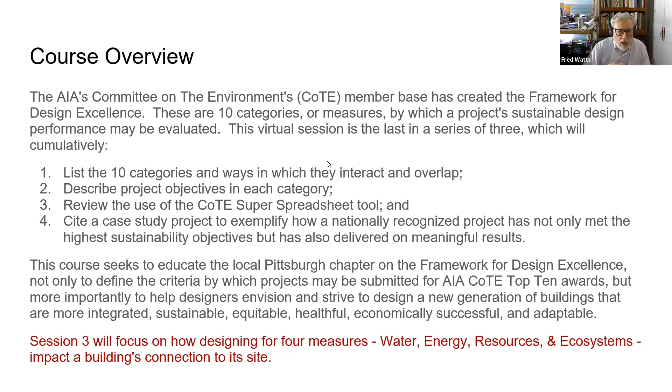So those are the learning objectives. You'll be familiarizing yourself with the COTE framework for design excellence, the conceptual questions that apply to each one of those sections, with the COTE super spreadsheet that most of you are becoming familiar with. And then a case study with Phipps Conservatory's Center for Sustainable Landscapes, the local project that we're all well aware of.

So starting off, we are dealing with design for water. You're looking at the landscape around the Phipps Center for Sustainable Landscapes. That presentation is from Ian Cook. Ian is a building rating systems project manager and an architect at Evolve.

At Evolve EA, he does certification management. He did the certification management for Pittsburgh International Airport. He's worked at the Bridger View neighborhood development in Bozeman, Montana, and the Greater Pittsburgh Community Food Bank's expansion and renovation. He's also part of the design team for several projects for the Pittsburgh Water Authority. He's consulted on LEED certification for the Gateway Arch Museum expansion.

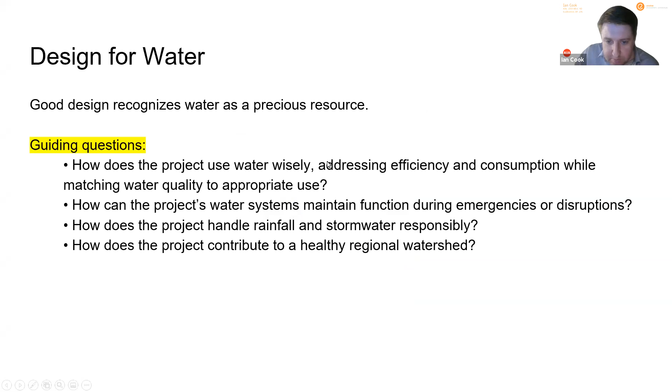He's going to be dealing with design for water and answering these guiding questions as we go along. Ian? Oh, yeah, sure. Thanks, Fred. Appreciate it. Let's see. So I was going to share my screen here. There we go.

Okay. Yeah, so as Fred mentioned, framework for design excellence, covering the design for water section. Good design conserves and improves the quality of water as a precious resource. Focus topics for this section include indoor water efficiency, outdoor water use reduction, process water reuse, capture reuse of gray water and/or black water, rainwater, stormwater use and management, and net zero water buildings.

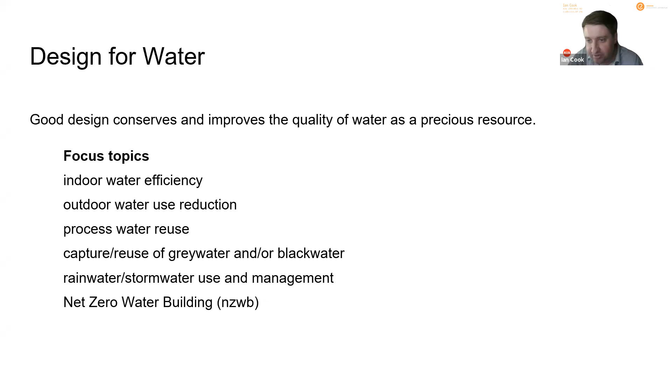Topics for consideration within the section include: how does the project use water wisely, addressing efficiency and consumption while matching water quality to appropriate use? How can the project's water systems maintain function during emergencies or disruptions? How does the project handle rainfall and stormwater responsibly? How does the project contribute to a healthy regional watershed?

Brad will explain how this was realized in the CSL and the Phipps Conservatory campus and what the water portion of the super spreadsheet looks like. But first, I'll go through a few brief high-level examples within the work of Evolve EA and previous work project experience.

There were quite a few projects from before I was at EvolveEA, going back a little bit. This one, upon its completion in 2003, the David L. Lawrence Convention Center was the world's largest green building at 1.5 million square feet, and was the first LEED certified convention center.

EvolveEA and its consultant team were hired by the Heinz Endowment and Sports and Exhibition Authority of Pittsburgh and Allegheny County to perform a post-occupancy analysis of the DLCC's green features, including water systems and existing data collection.

The EvolveEA team guided the LEED Existing Buildings pursuit, and the study culminated in the facility becoming the first LEED EB Platinum convention center in the world.

Some of the water features from this project include an aquifer used for landscaping, irrigation, and cooling tower feed, and a gray water reclamation plant, which reduced water usage by 66%.

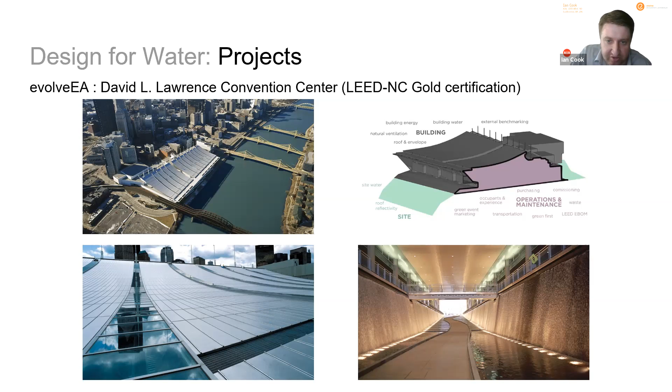The next slide here is the Frick Environmental Center. EvolveEA worked along with the design team, including Patricia Cully, who's on the presentation here as well, to help guide the project through the Living Building Challenge planning, design, and certification process.

Many aspects of the center's design combine strategies that holistically address its integration with the landscape. The parking area, for example, features permeable pavement and is covered with trellises that hold solar panels and collect rainwater.

The building is responsive to its natural environment through sustainable landscape best practices. It is also designed to manage all stormwater and wastewater on site.

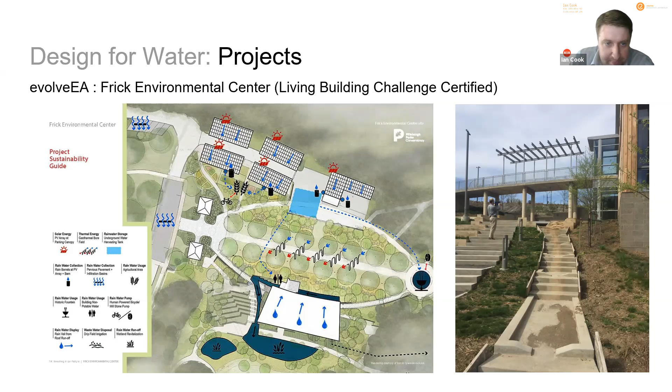This next project, the Ross Reserve through Purdue University — EvolveEA guided the development of this project from its conception through the design process. Site location, building program, and form were carefully considered throughout the process, with scenario testing for water calculations.

The client's commitment to living building principles gave an imperative to achieve net zero water use in the building's design. Just as a biological organism seeks homeostasis using feedback loops to adjust to changing conditions of its environment, the architecture frames and captures site forces such as stormwater, wind, and plant communities.

This next one is a current project. EvolveEA is currently working on a number of projects along with the Pittsburgh Water and Sewer Authority. Investing in the infrastructure will reduce water loss.

Many of the pipes in the system are over a century old, and incremental replacements with modern fittings will reduce water loss over time. PWSA is making significant investments now on major components of the distribution network.

Water is a single resource that connects us all and must be managed collaboratively. So that's sort of an overview and an interesting look throughout the Pittsburgh region.

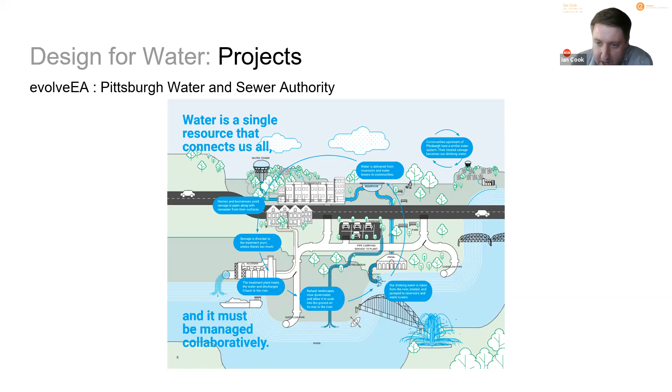The next project, from previous work, is the Jan Phillips Learning Center, an offsite extension of the College School's urban campus in St. Louis, Missouri, which expands on their mission to engage and captivate students through nature-based experiential learning.

Rainwater is captured and reused, composting toilets reduce water consumption, and the project makes use of natural resources that would otherwise be wasted. An aqueduct feature helps create not only a place for learning, but also spaces that can be learned from — there's the aqueduct feature there, the concrete retaining wall.

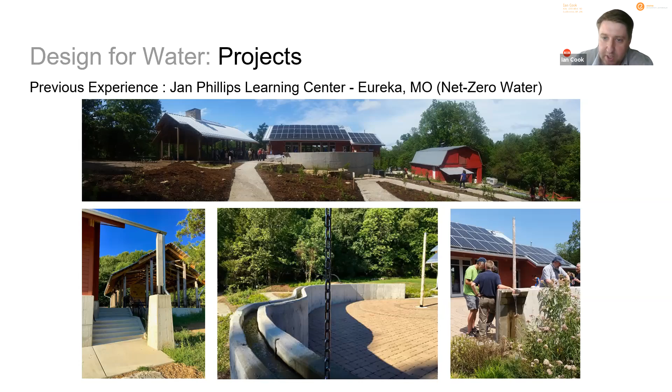The scope included providing a feasibility analysis and creation of a master plan for the overall site. Great effort was made to protect LaBarque Creek, located on the property, which is one of the most pristine tributaries to the Meramec River, which then flows into the Mississippi.

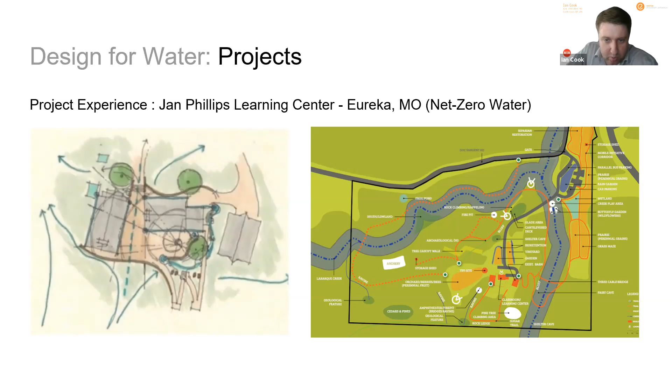That was the section on water, and those were the projects I was covering here, so I can stop sharing. And then I don't know if it was Brad who was going to take over at this point.

Or on to Craig? We're going with Brad next. Yeah, thank you, Ian. Let me pull up the screen share.

Thank you, Ian. Yes, so throughout the previous two workshops and then during the course of this third workshop today, what we've been doing is sharing...

...taking our Phipps Center for Sustainable Landscapes project, which is an on-site building at our Phipps campus that houses our administrative staff as well as some of the environmental education programming.

It was constructed in 2012. It is a certified living building, so you'll see some of the features that I'm going to highlight here in the resulting three topic presentations.

I'm going to emphasize those principles that are contained within the Living Building Challenge certification process, especially related to water, energy, resources, and ecosystems today.

So what is the sort of highlight of what Ian was showing before from the framework for design excellence, principles that I'll try to reflect in how I share how we completed the COTE super spreadsheet tool to respond to the specific questions, hopefully share examples of our experience completing that tool, and then how the project itself reflected not just the framework guidelines but the specific questions referenced in the COTE super spreadsheet tool.

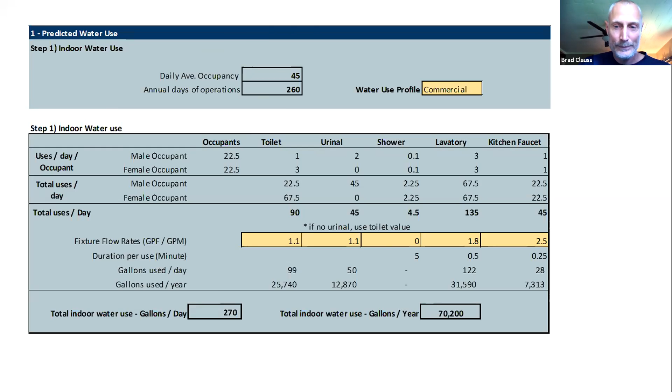The second question, which I think explains why some fields in the corresponding irrigation estimator didn't produce numbers, was because I answered specifically for the CSL project that potable water is not used for irrigation. It's all rainwater harvested that we use for irrigation on the project site. So I think that explains why some fields didn't populate, you'll see blanks under annual irrigation water use calculation. I believe if you answer no, the spreadsheet won't populate that for you.

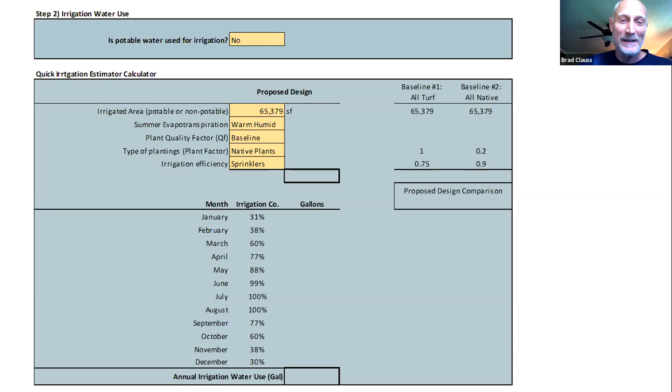There were some parameters we pulled from the project site itself for CSL: the irrigated area estimate of roughly 65,000 square feet, the climate zone for estimating evapotranspiration, plant quality factor which was a range from water stress to non-water stress, which I qualified as baseline, and our estimates based on a typical precipitation event or year. For type of plantings, our planting plan involved all native plants, so that was an easy one to specify. For irrigation efficiency, we have a small amount of drip irrigation, but we also still rely, unfortunately, on sprinklers in a lot of cases when we do irrigate.

The cooling tower section is probably applicable to a lot of project sites with larger cooling capacity, where you'd need to fill in these fields. For us it was simple because we don't have cooling towers or chiller systems involved in the project or associated with the HVAC systems at CSL. So our cooling tower water usage was zero, and non-applicable was our response to the other questions related to cooling tower water efficiency. But having worked with cooling towers before, I understand this could be a significant source of water use at a site that does use them for HVAC.

The second section of the water spreadsheet looks for a combination of predicted or modeled water usage compared to the actual measured performance period of water use. For our project, we had a formal performance period through the living building certification process, so I was able to easily extract that 2014 full year performance data. So the numbers represented here show how the site performed. The model numbers are largely estimated calculations based on precipitation for the rainwater extrapolated out over the year, a rough estimate of evenly divided precipitation across the 12 months.

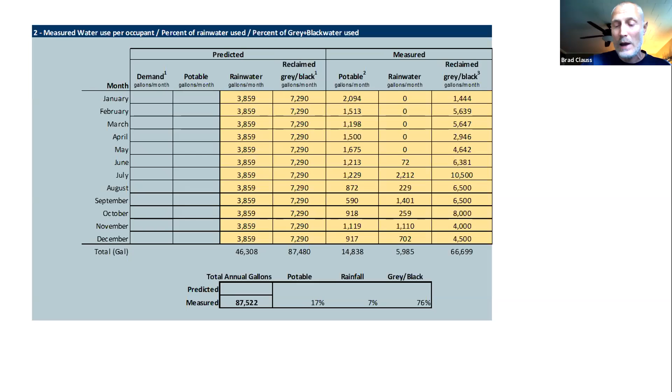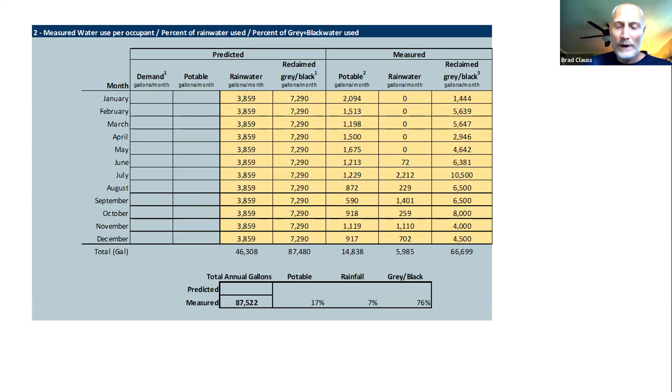Reclaimed gray and black water was estimated based on the potable water discharged to the sewer, which is all treated on site and then reclaimed to be reused for toilet flush. So that's basically an estimate of what our fixture flows put into the system would be, extrapolated out over the year. All said and done, the estimated total annual gallons came out on the measured side around 87,000, just under 90,000 gallons per year. You can see the breakdown, partitioned by potable, rainfall or rainwater recaptured and reused, as well as gray and black water reused at the campus.

Overall summary - I think it didn't produce some of the predicted numbers you'll see in that first section because the tool was missing irrigation. But on the measured piece, it's a little unusual because the site is net positive water, so the numbers will come out negative. What this is showing you is that we harvest roughly 57,000 gallons more water than we actually use from a municipal potable source.

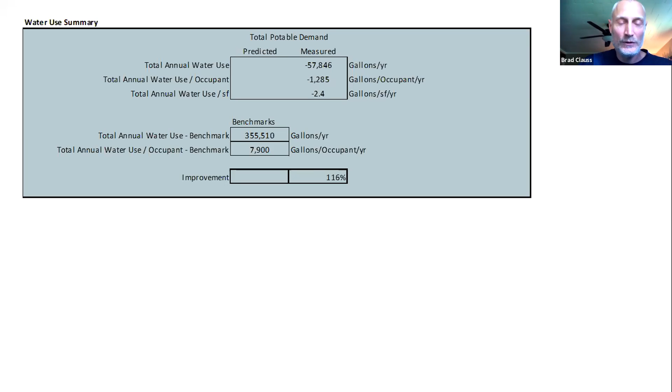Stormwater management is the other key component of the tool and the water measure, focusing largely on storm events - in this case a 24-hour, 2-year event. This was something we were able to pull from our existing stormwater calculations, going back to the reference design information for the stormwater systems at the site and pulling out the 2.35-inch, 24-hour, 2-year event for our region in Pittsburgh.

There's a calculated storage capacity from the combination of our retention basins, plus some infiltration galleries with fixed storage that aren't lined and infiltrate into the subsurface. All told, we've got about 13,000 cubic feet of capacity for rainwater storage, which is pretty enormous. So in the overall calculations and measures of efficiency, at least from a 24-hour, 2-year storm event, 100% of the stormwater on our site is handled on site and will never leave.

The last question was related to the treatment of stormwater conditioned on the site, on a scale of 1 to 5, and I believe my response was 4 - just below the maximum score, which was that the runoff is mostly treated through natural filtration, a combination of rain gardens, bioswales, and retention for infiltration purposes.

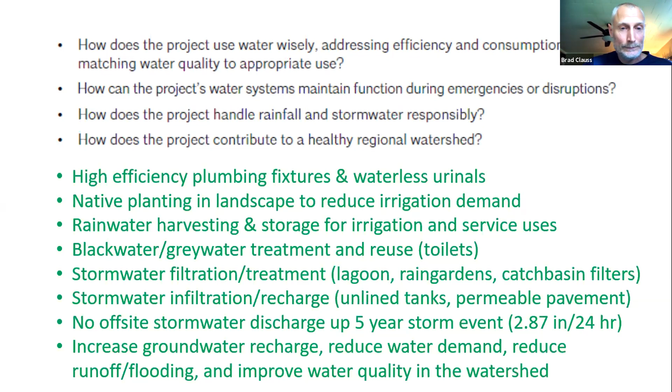We're actually capturing some of the rainwater that's not from the project site, from our tropical rainforest roof, harvesting that and storing it so that we can use it as a backup for the toilet flush system, as well as for all of our irrigation and other needs at the site itself.

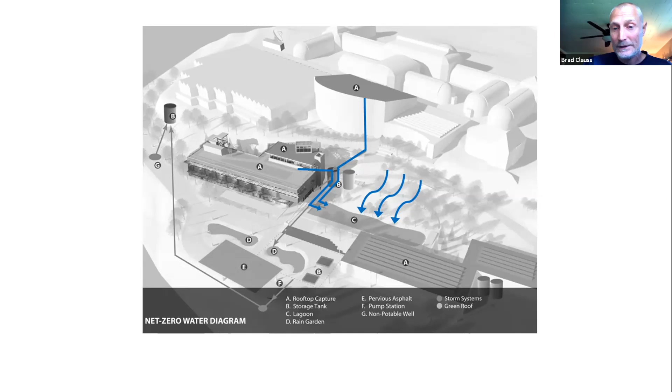There are a number of other areas where the actual groundwater flow is feeding the on-site lagoons or other sources of storage at the site. This big blue section you see illustrated here is actually a combination of a lined underground storage tank and an unlined underground storage tank.

So the surplus water from runoff that would exceed the volumes of the rain gardens could overflow into that unlined tank for additional storage capacity. Then that much larger underground storage tank is a reservoir of stored rainwater from various different rooftops at the site, which we can harvest not just for use in the CSL, but also for use at other parts of the larger campus.

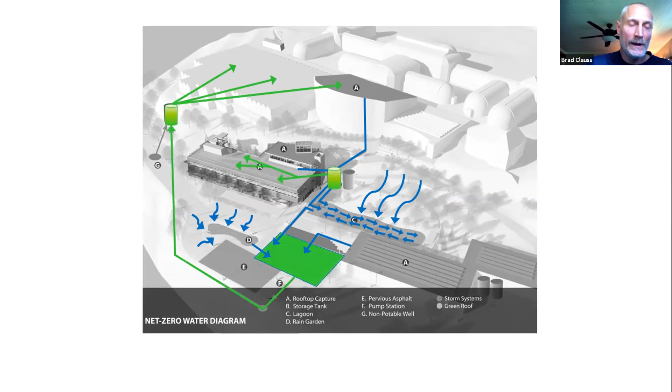The last representation is that there's a second upper storage tank that we pump water to, where we can actually pump that to other parts of the campus, mostly to our production greenhouse.

This is actually a similar representation or demonstration of what the system for our on-site wastewater treatment looks like. So all the gray and black water from the CSL goes into the first stage of treatment, which is basically a traditional settling tank where the solids are removed. Then from there, it passes into a constructed wetland for biological treatment.

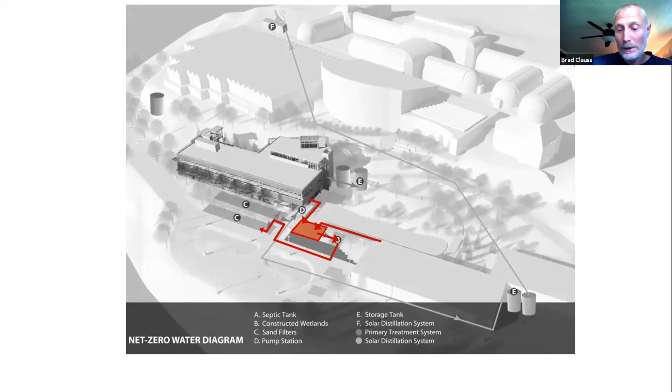After it passes through that constructed wetland, it then goes through a series of recessed in-ground sand filters for a more formal mechanical form of treatment. Ultimately it's recollected in a cistern, which is then pumped to a temporary storage tank adjacent to the building, where it can be harvested and recirculated for use in flushing the toilets at the site.

This additional system you're going to see represented here was originally planned to take care of the excess volume we accumulate over time from the reuse water system. The original intention was that this would be used for evaporative distillation on one of our rooftops at our production greenhouse. Unfortunately, this is an example of a technology that didn't pan out the way we expected—we're always innovating, and in this case the innovation didn't pan out the way we expected it to.

So that water is currently still being collected, and we're trying to find an alternative use for it, since this distillation technology didn't quite do what we expected it to do. That piece is something we'll probably do additional treatment to that black water so that we can apply it for irrigation somewhere else at the site.

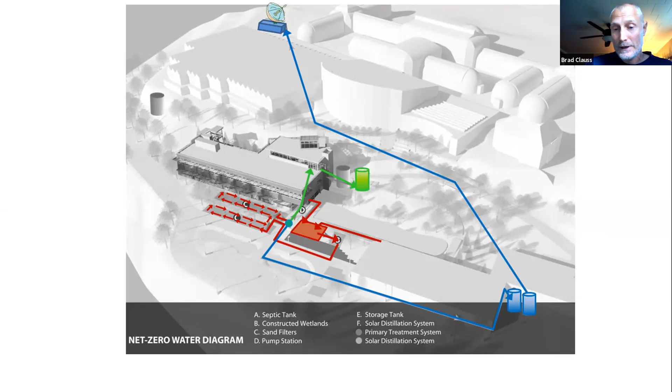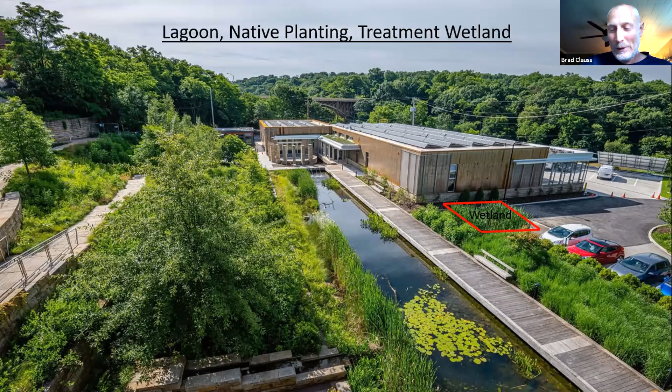This is a good aerial view that gives you a sense of the lagoon and how it's interconnected and associated on the property with our constructed wetland. You can see it highlighted there, though it gets lost in the green, but underneath that there's actually a constructed wetland.

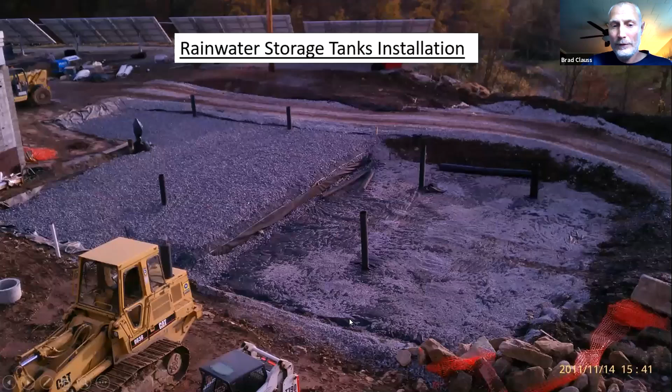Second to the foreground is an unlined underground storage tank, designed primarily to take excess flow from some of the rain gardens and any additional flow that can infiltrate, functioning as an infiltration gallery, as opposed to a storage tank from which we can actually recover water.

This gives you another stage of the construction. You can see what it began to look like before it was capped, with the rain garden and the pervious surface of the asphalt.

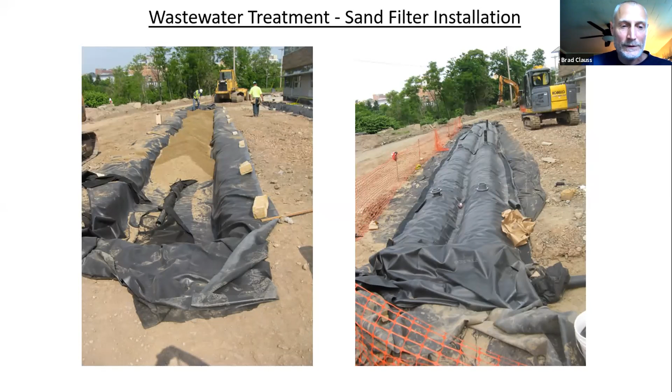And that covers everything for the water portion of our CSL project.

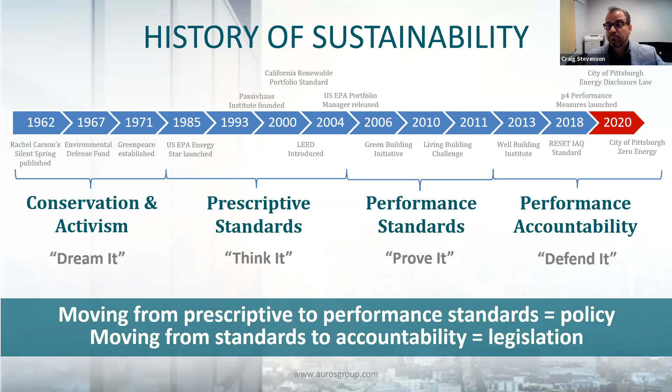When you deal with outcome-based design decisions, you really have to start to understand how you get there. What does the end game look like? This idea that LEED and other sustainable certification programs have taught us is that you start at code-based construction and you work your way down. I want to be this much better percentage-wise based on ASHRAE or based on code-based standards. And we always work our way down.

When we do that, we find that we might get 10 or 15, maybe 20% better than code-based standards. The other way to look at it, and what we're seeing as a macro trend in the market right now, is starting with a bottom-up approach.

The question becomes, from a building science perspective, what is the most efficient building we can build? Passive house really kind of leads that discussion. And then when you consider that with the natural order of sustainability, what is the natural order of sustainability? It's a passive first strategy.

Active second, renewables last. We want to make all of our decisions around the envelope: massing and orientation, envelope optimization, climate specific thermal values, to maximize our passive strategies. That reduces our loads. Once we reduce the loads on the building to a building science maximum, then we want to start to ask ourselves, okay, what's next?

Well, let's look at our active systems. What happens when you get to those low loads is you start seeing decoupling happening. We're going to deal with our ventilation systems with energy recovery. We're going to deal with our heating and cooling systems with systems that we wouldn't have otherwise used, like VRF for example. In a code-based structure, that might be a very expensive solution that we simply can't afford. But in a passive house project, or a project with very low loads, that becomes a very real strategy.

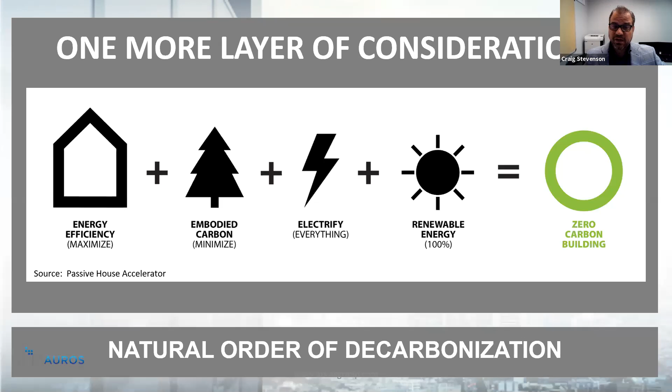And renewables last—you want to offset whatever low energy consumptions you have on that building with renewables. That's how you get to zero energy carbon. That's referred to as the natural order of decarbonization, which is kind of interesting. And what you'll notice here is these three strategies—energy efficiency, electrify, and renewable energy—they are enabled by the natural order of sustainability.

So where does the money go when we start looking at envelope-first strategies? We know we're going to invest a little bit more money in the envelope. The insulation thermal barrier is going to be a little thicker. We would argue that the air barrier goes in most buildings. Unfortunately, it doesn't get tested in most buildings, but it goes in most buildings. So that should be relatively par. And the windows and doors become a little more expensive.

That's true in certain climate zones, but we get the money from the mechanical system. So rather than putting a 300-ton air conditioning system on the roof, that becomes a 50-ton system. We take the money from that, we put it in the windows, and that's how we basically get the cost parity. And we'll show you the differences between small buildings and big buildings and why this strategy works way better for big buildings. I'm going to have a few slides on how we're going to show that.

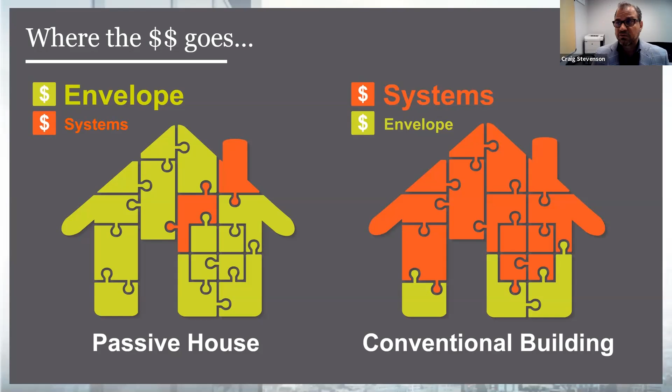And another thing here is insulation never breaks. So if we take a passive-first strategy, that's going to be in place for 50 years if it's done right. And if it's QA/QC'd right, insulation simply just doesn't break. It just lasts. And it's really a simple idea.

Find one—Carrick Library is a public passive house project. Walk in there in the middle of wintertime. You'll see the buses going up and down the street. You don't hear them at all. You don't feel them because basically you're in a soundproof barrier. There's so much insulation in there.

And if you put your hand on the window and then you put your hand on the jamb, you're not going to feel a delta in temperature. That's really what a passive house is all about. It's a simple, simple idea of keeping your energy and not just sending it out into the environment.

So what does that mean? If you think about it from a passive house perspective, if you really want to use building science to get there, there are five key principles. Climate-specific insulation levels. Now we might say, okay, well, we're already at climate-specific insulation levels. What Passive House has done is they've identified the law of diminishing returns. When does the envelope stop paying?

Does it stop paying at an R38? Does it stop paying at an R50? We've been on projects where they're doing a re-roof and they specified an R50, and we asked them why. And they said, well, we want to save energy. Did you model it? Did you know that that's your efficient level? After we basically got into the project and identified their low energy solution, they ended up going to an R32. They didn't need an R50. So they were kind of overshooting it because they just didn't understand the processes.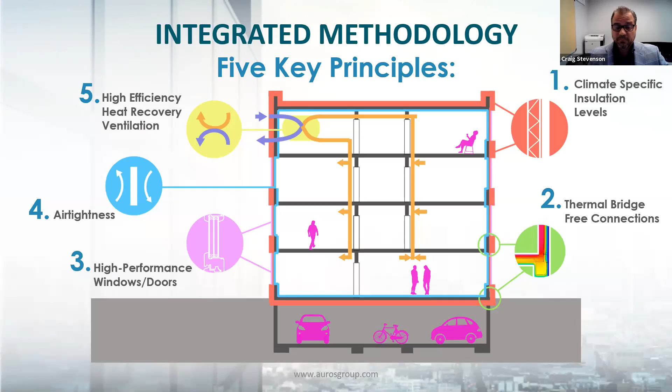So there's a mantra in passive house: maximize your gains and minimize your losses. It's all about balancing. When you get into a project for a passive house, you're balancing everything. Someone told me at one time, it's like having six dials and you're moving dials to figure out—I want a little more wall insulation, a little less U value in my windows—and you start dialing then.

It's all about balancing the energy balance for the optimum performance of a building. So you're optimizing the thermal enclosure, you're optimizing your heating gains, and you're optimizing ventilation, and you're doing this all in the context of a whole building. And this can only be done with an energy model. You can't put a thumb in the air and kind of guess your way to it. You really have to use whole building energy modeling to answer these questions.

And again, this gets at active systems with smaller loads, decoupling, and ventilation with balanced energy recovery. So these next three slides are probably the most important slides that I kind of grabbed based on the time we have here today. And I can't tell you how often I've been on projects where the teams have simply just disrespected building science, and you're seeing buildings that have crazy massings.

But having said that, I understand architecturally we want to build beautiful buildings. But if you understand your surface area of walls to volume of air ratios, and you understand what good and bad looks like, you can start to manage that.

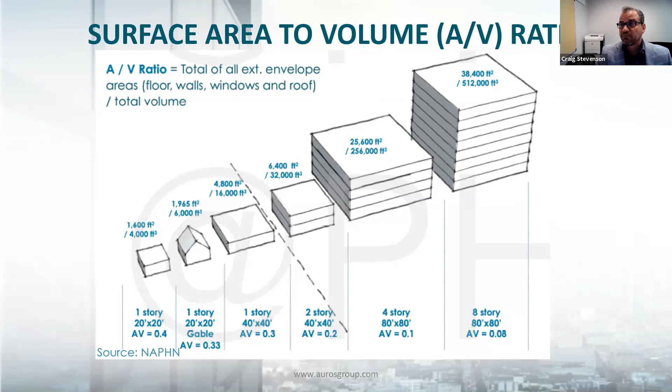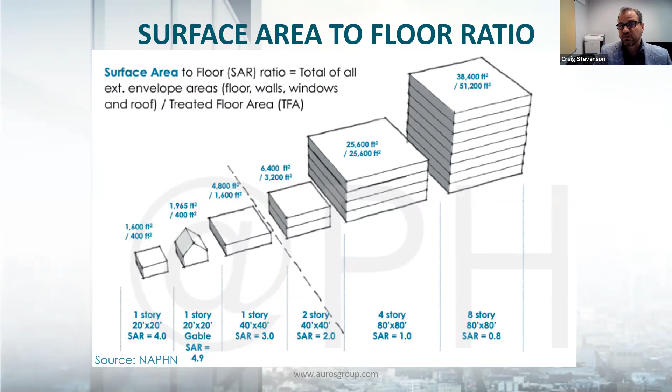You can also do it by looking at the surface area to floor ratio. Not as accurate, but if you're talking about early conceptual massing and just looking at what your massing might be best suited for, you can take an SAR value. Here are your targets: 0.8 for really good buildings, and 4.0 for really challenging buildings. I'd argue that the surface of wall to volume of air ratio is a much better way to do that early analysis, but you can certainly do a quick analysis with just surface area.

So this is a really important slide to keep in mind when you're starting to think about orientation, glazing, shading, how you optimize your solar gains and losses. This is where slides like this become very helpful in early conception when you start considering your passive house envelope for continuous insulation, thermal bridging, and air barriers.

If you do everything right, it becomes a win-win-win strategy. There's a reason we lead on all the projects brought in to talk about with passive first strategies, because when you solve for passive first strategies, it leads to everything else.

When I have a tight building, I control infiltration and exfiltration. I'm keeping the outside out and the inside in. When I want to ventilate, I'm bringing it through my ductwork and filters. Now all of a sudden that fixes indoor air quality very quickly. So you can see that the envelope is the pathway to indoor air quality.

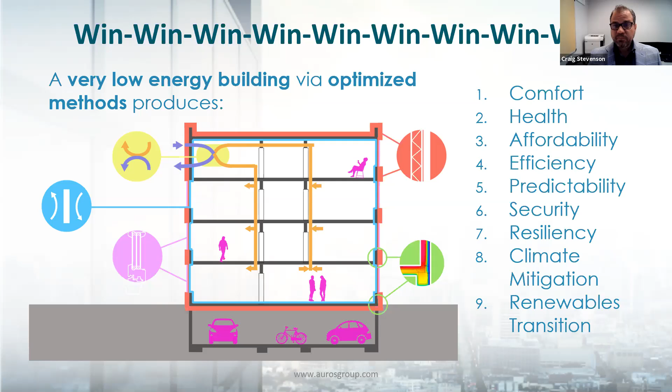This is how you do a renewable transition, because now all of a sudden we have affordable photovoltaic arrays. So I promised you guys I'd give you a few case studies.

This project here is the East Liberty Presbyterian Church. I'm sure most of you are familiar with it. When we were brought into this area, we were doing a mechanical retrofit for the church, and we started to take a passive first strategy. You might wonder how the heck do you do that? It's all limestone. And it is. But we basically created airlocks around the entrances, and we were able to basically contain air that way.

All of the existing windows were basically treated. We sanded down all of the pitting for the aluminum, and we put new gasketing in. We did a blower door test on this—it was the biggest blower door in Pittsburgh at the time. We were able to basically reduce their energy consumption by 30%, using passive first strategies.

This building became a Reset Air certified building. Reset Air is an indoor air quality standard. If you don't know about it, you probably should Google it and check it out. There's a lot of Reset Air work going on pretty much everywhere. Every project that we're doing is a Reset Air project at this point.

And this building is also a smart building, so it is tracking and trending digitally all of its mechanical systems, all of its utility consumption, and reset indoor air quality for Reset Air. These are just some images about the dashboards, and I'm more than happy to show the dashboard. It's a public dashboard for this—if you need it, just shoot me a quick email.

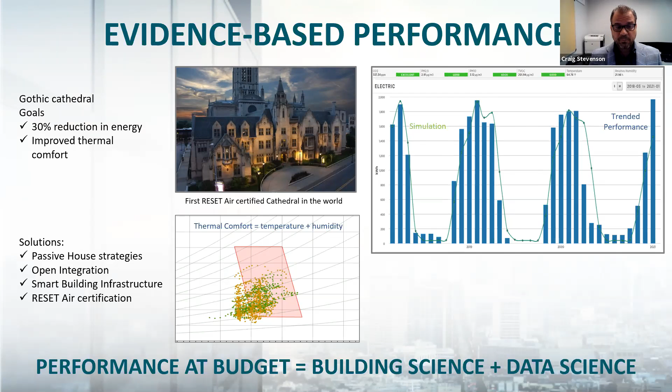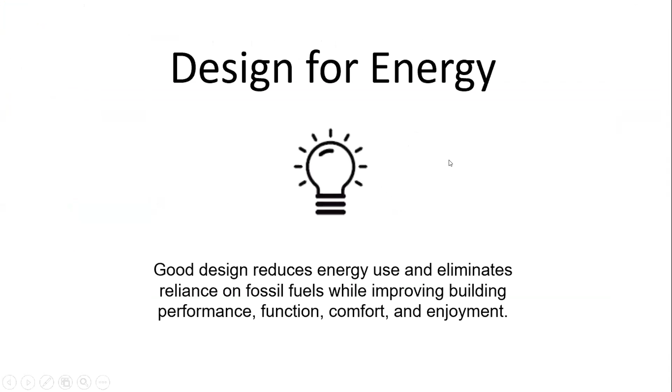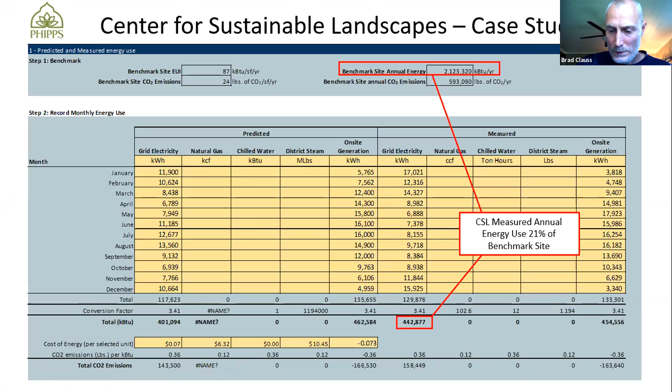Thank you, Craig. I think you'll see that a lot of the principles Craig was just describing, especially with the early slides he shared about where we started, will line up with what I'm sharing. Our project emphasizes starting from passive, then active, then minimizing what we'd need in terms of overall offset. Certainly we meet electrification, so all those principles will line up with the CSL.

Obviously this is from 2012, so things have moved along even further in terms of passive house design since then, but a lot of the same principles you're going to see emphasized here are reflected by the performance metrics in the tool itself.

So these are the first inputs into the COTE super spreadsheet tool, similar to water, just an overall evaluation of what our energy model was predicting for usage in the building versus what our actual measured performance was, which is what you see highlighted here in the chart.

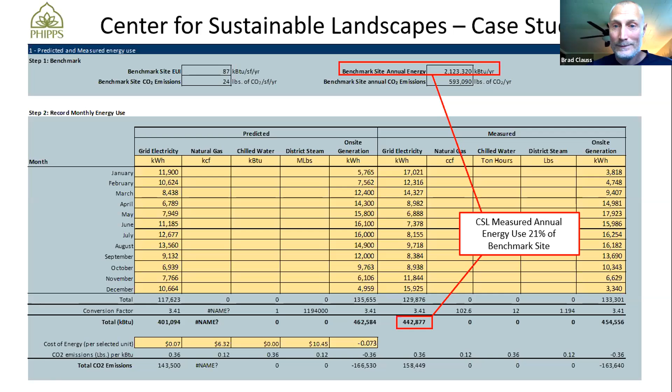So reflecting on the specific strategies we employed for the CSL, it goes back to what we referred to before in terms of starting with the passive components we put in place simply to avoid having to do anything active in terms of energy input for conditioning the site. One big one, early in the process, was orientation of the building so that we could maximize daylighting and passive solar heating.

So you'll see in one of the upcoming slides where I'll share how the building is oriented, picking up certain south-facing elements of the building to maximize those parameters.

Natural ventilation: when outdoor conditions warrant it, we have the capability to open operable window vents and roof vents, as well as a large number of door systems. We have a lot of glass walls and folding door systems on the main vestibule of the building that can be opened up, so certainly this time of year and in the fall there are a lot of days where we're able to take advantage of natural ventilation to condition the space and bring in outside air.

We also have a green roofing system on the third story. There's not only the traditional green roof benefits of stormwater runoff reduction, but also some insulating properties that it's offering us on the second and third story of that building to minimize, in terms of the envelope itself, the heat load of the building.

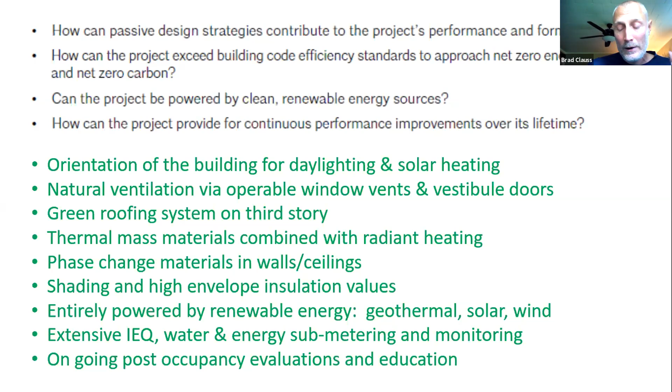So in terms of our long-term performance, we're constantly analyzing the building and tweaking it. That's always an important principle to highlight: the work isn't done once construction is completed. We're constantly intervening with this building and looking at ways to improve its performance over time. The other piece is we're always doing ongoing post-occupancy evaluation to see what we could do and what the customers and occupants are telling us about its performance. And ultimately, situations like this are where we share and educate others about what we've installed and some of the learnings we've derived over the years since 2012.

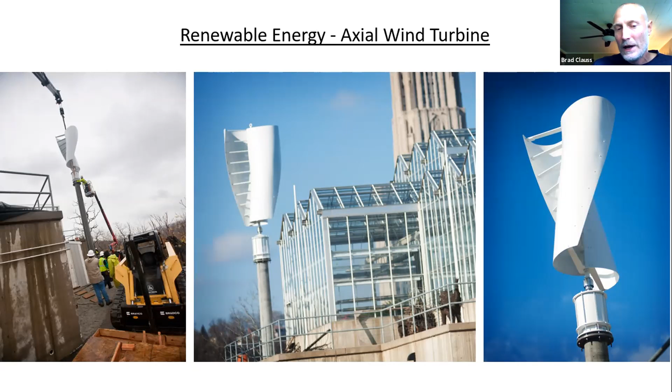This is the small demonstration wind turbine, an axial wind turbine that we installed, which also complements or supports the renewable offset for the CSL building and project. Ideally it should be at a higher elevation, but because of restrictions with the city, it is not at its ideal or maximum elevation to produce the desired output. So it does get some interference and windbreak from the structures behind it, the production greenhouse and some of the adjacent structures. It does produce, we monitor it and track it, but there's certainly the opportunity if it were sited at a higher elevation to have a lot more production associated with it.

These are some photos of the geothermal installation for the site. It's a total of 17 wells sited just adjacent to the property, most of which are right on the edge of our parking area for the site. You can see here demonstrated him setting the supply and return piping in one of those vertical wells.

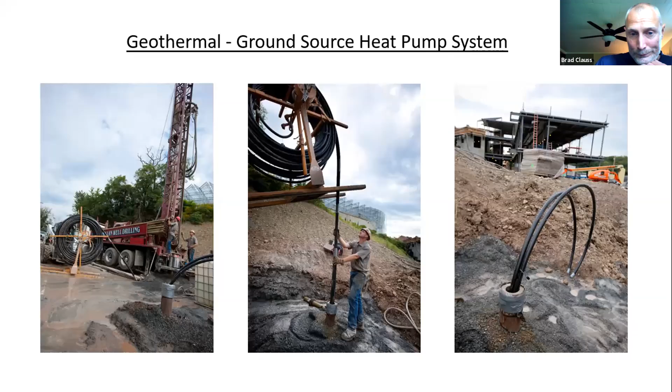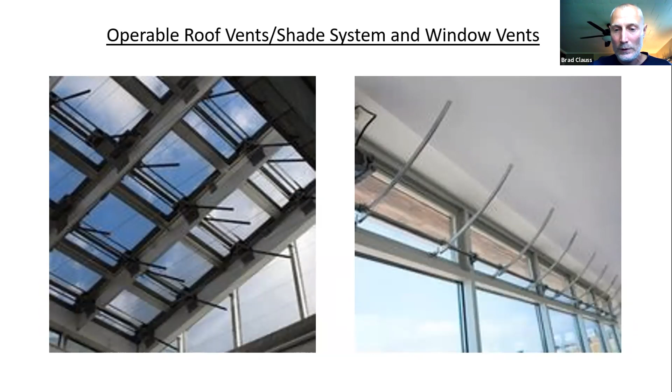These are just examples of our operable roof vents in the atrium. On the right-hand side, you'll see that each of the workspaces has upper windows with operable vents that open based on certain outdoor air parameters, allowing natural ventilation to occur in the actual occupied spaces as well as in the atrium.

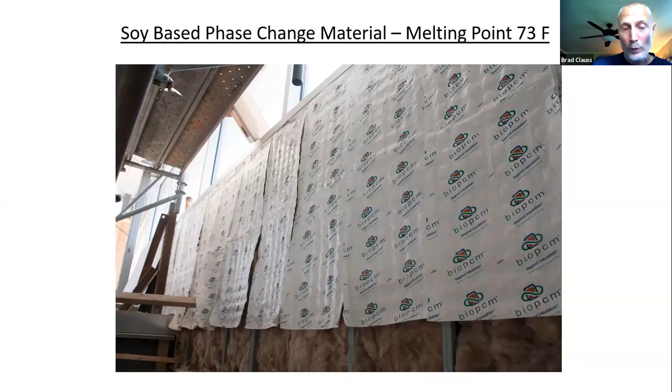This is a shot of this soy-based phase change material. The unique melting point property of this lends itself to a melting cycle that allows it to, the primary benefit of it is during the nighttime, the phase change of the material actually adds additional heat to the space, allowing us to maintain overnight, particularly in the winter, heat that was stored in that latent heat of phase change of the material back to the space. So it's acting as a source and sink when we want it to inside the walls themselves.

To address other specific parameters they're looking for inputs on for the COTE spreadsheet, one is related to lighting power density. We did, fortunately, through the energy modeling, have a target parameter for that. Our installed lighting power density was 0.75 watts per square foot. When you look at the tool itself, that put us at roughly just below 30% reduction over what the benchmark site called for, in this case an office/educational space, which was the majority of the footprint of the building. That is the benchmark density for lighting power density that we used for this project.

One thing I will note is if you go into the current tool referenced in the COTE spreadsheet, it's going to the 2021 International Energy Conservation Code, and it's a significant step up because of all this solid state lighting technology. So 0.75 is probably no longer relevant. For 2015 targets, yes, we did exceed our target parameter and come in below it. But most of the spaces across the board have significantly reduced watts per square foot in these new International Energy Conservation Code target numbers for the various different spaces. I was a little surprised to see it goes down pretty substantially with all the low wattage from the solid state lighting that's introduced now.

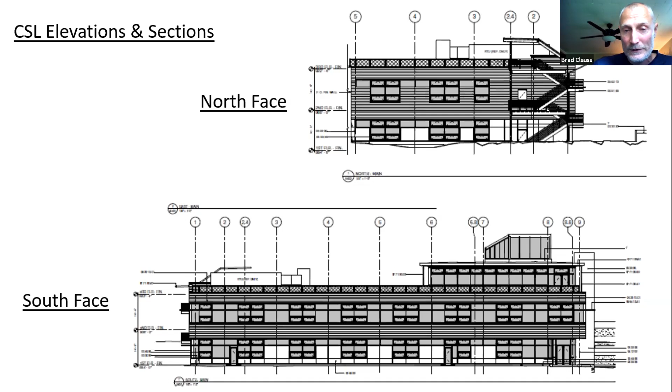So good to know that we were in the target range of 30 to 40%. We're sort of towards the higher end of that, but when you see some of these slides, particularly on the south face, we've got a pretty significant footprint of windows. I think on that face I was getting close to 50% of the south face actually covered by window space. Obviously on the north face, slightly less, but still not insignificant in terms of coverage of windows versus wall. And then a little bit less or more modest on the west and east faces of the building, which are in general the slimmer profiles and the sort of rectangular footprint of the site. I think that covers everything I had for the energy piece.

Next section is on resources. Let me share my screen.

Alex Co is dealing with that one. Alex is a research manager at the Living Building Challenge, Living Building Product Challenge. He studies embodied carbon, material health, environmental impact. He's certainly a materials expert. He has training in chemistry, toxicology, and life cycle assessment, as he came up in the business doing nonprofit consulting, and really has a heart for environmental justice. He's a Living Future Accredited, a LEED AP, has credentials in GPRO. He's got a master's degree in environmental management and a BS in chemistry from Yale. He claims he's a proud low-income, first-generation college student. So take it away, Alex.

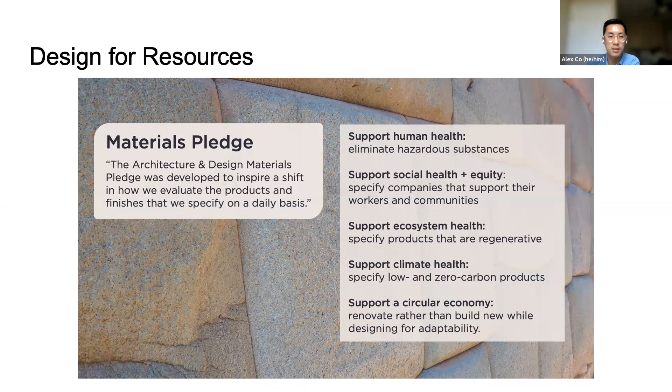Because we're talking about this more closely, I just wanted to share a couple of recently certified projects by ILFI that I think had some really cool materials achievements. For me, design for resources explores this tension between what's tangible and what's hidden or embodied with respect to emissions, impacts, and supply chain.

With the Kendeda Building in Atlanta, that team took one interesting approach: creating a materials committee comprising sustainability experts from their contractor and the architect to collectively find materials suited to the project requirements. What's interesting about it is that it's in a humid southeastern US climate, so there needed to be insulation as well as making sure that energy consumption would be reduced while operating in that climate.

With the Harvard Science and Engineering Complex, one story that came out of that project is the team investigated over 6,000 materials options in the construction process. Some things in that type of project, like lab equipment, aren't necessarily always common and asked the materials questions of substances, embodied carbon, and all these things. So just two projects that we were able to support through certification pretty recently that I think had some great stories.

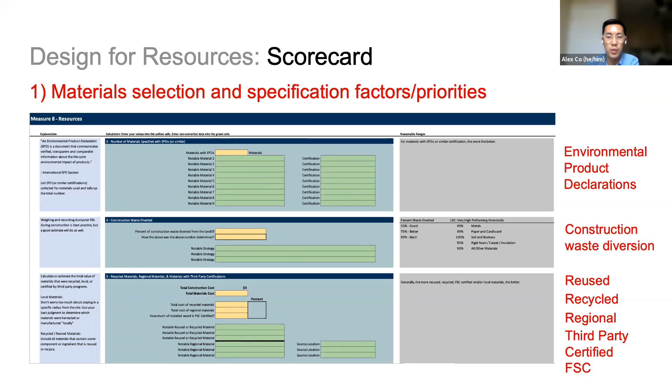Looking at the scorecard, there are 5 individual sections, and one set of the prompts speaks to materials selection and factors at that individual material level. The first are environmental product declarations, or EPDs, the use of reused, recycled, regional materials, third-party certified materials, FSC woods, and then the act of considering waste diversion during the construction process.

I think much of this gets at the hidden and embodied emissions incurred by actually creating and manufacturing materials. We can think of operational energy that shows up elsewhere after occupancy, but there's a whole set of impacts associated with the greenhouse gas emissions arising from manufacturing, installation, maintenance, and disposal of building materials and packaging during the construction of buildings and infrastructure. In the general discussion, we see steel and cement getting a lot of focus because of their energy-intensive processes to make and extract the raw materials that go into them.

Within the practice of life cycle assessment at the building scale, there's a tool called the EPD, or Environmental Product Declaration. There's a whole vernacular around what scope and what letters and numbers refer to in that type of disclosure, but usually the focus is around A1 to A3, which you might also know as cradle to gate scope. For the individual product level, that's the concept of focus, because that's what's pretty standardized for manufacturers that they can directly control.

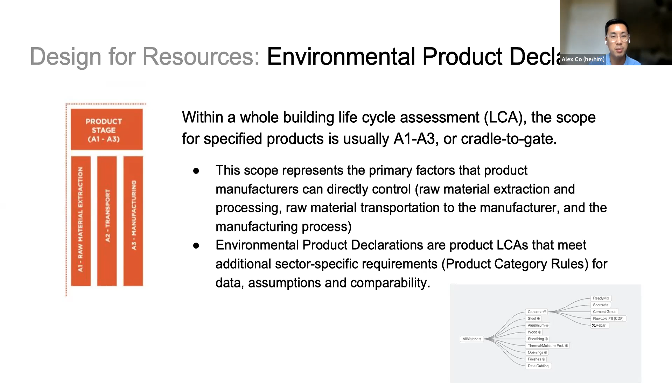The section on reused, recycled, regional speaks to mitigating emissions associated with manufacturing, because there are three different approaches that reduce the impact of a globally sourced product in different ways. I think there's the idea of always considering materials reuse first, because that completely eclipses and avoids a lot of the emissions associated with manufacturing something, especially if it's in situ and you can just build around it if it's a reuse or adaptive reuse project. Recycled materials can mitigate or eliminate some of the impacts associated with raw material extraction and processing.

Regional materials mitigate emissions associated with transportation to the project site. That can, in some ways, be counteracted by the fact that a lot of building products have global supply chains that may get some parts from the US and some parts from Asia. Construction waste diversion mitigates impacts with hauling, landfilling, and other end-of-life scenarios.

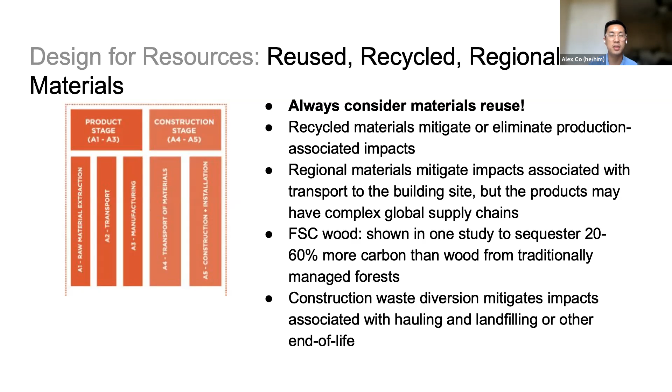Something that's in the spreadsheet as one line, but doesn't feel the most connected to the rest of that section, is FSC wood. But there's a general understanding, and one study shows that FSC wood sequesters significantly more carbon than wood from traditionally managed forests. So there's an argument to include it in this greater idea of reducing process and construction emissions.

The other part of that section talks about third-party certifications, which are also sometimes thought of as a logo soup or an alphabet soup. But the goal of them is to aggregate and rate multiple dimensions of sustainable performance, and I think reduce the amount of work to find products that meet performance and project requirements. Part of why they've proliferated so much is a lack of federal regulation, or a lower floor of performance in terms of what products need to meet, though some are federally sponsored as well.

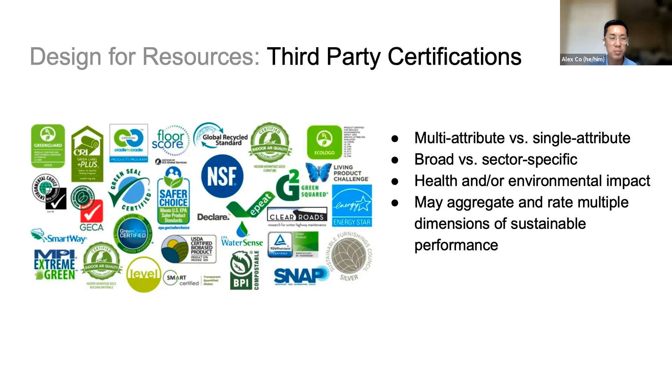I think there are several spectrums in this world, including being single attribute, maybe focusing on health or water efficiency, versus multi-attribute, focusing on different dimensions and product impacts. There are those that are broad and represent consumer products or building products generally, and there are some that are more exactly focused on one product sector, such as flooring or office furniture. There's a proliferation of them, but there's also a wealth of existing resources to provide designers with at least a basic and essential understanding of what they're intended to communicate and what they'd mean toward meeting project requirements.

If we zoom out to the larger level of the project, the other two sections prompt the user to think about embodied energy and carbon, and doing a life cycle assessment to quantify impacts across the whole life cycle of a building.

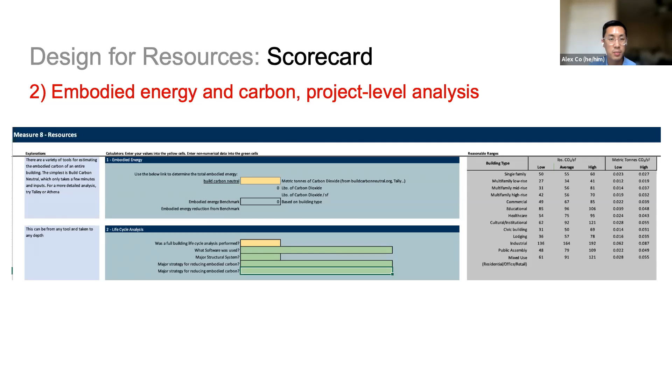I think there are a few compounding forces that amplify this importance. There's consumer preference—occupants and consumers are ready for businesses and firms to demonstrate action on climate. There are investor pressures to demonstrate transparent, science-based reporting and impacts, showing that you are developing the capacity to make these analyses, and challenges in the entitlement process of developing and securing a building.

So there's an economic rationale that underscores the data piece, and also this moral and justice imperative of materials, because there's the impacts and the numbers, and then there's the health concerns of VOCs and other factors of material selection—though those are covered a bit more in the design for well-being part of the framework.

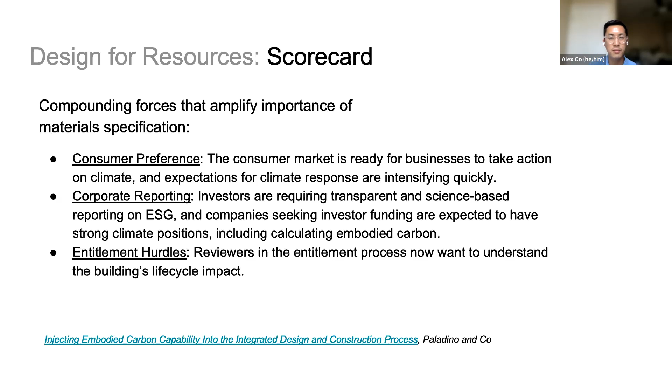The scorecard, the super spreadsheet, actually links to a carbon estimator tool that I clicked on, and it dates back to 2007. It's kind of rudimentary in how it operates, and there are a lot of assumptions—whereas now we have a lot more data that these powerful tools can really process to give a more specific evaluation of a project.

And there's even more on this page as well. Marrying those two ideas together, you can improve how specific an analysis is at the project level by finding more discrete data points from EPDs. Identifying software packages that integrate seamlessly with existing tools and practices is a good way to on-ramp into doing more of these analyses.

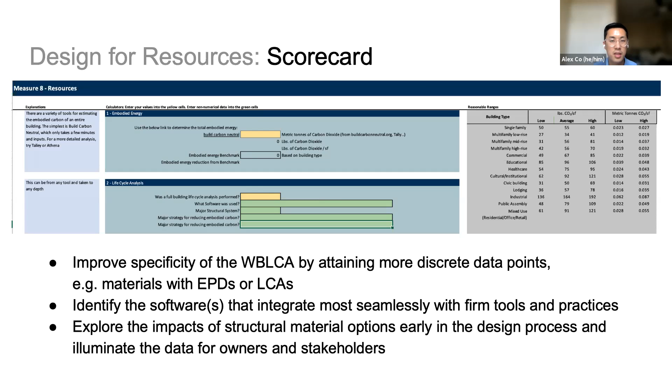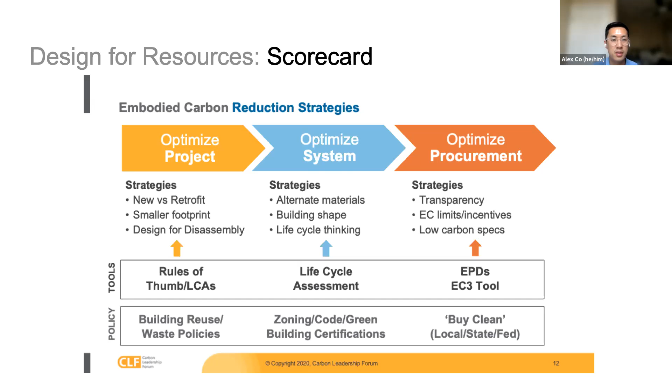Just quickly, the Carbon Leadership Forum, a group advocating for reducing embodied carbon of the built environment, thinks about optimizing reduction strategies at the project level, the system level, and procurement practices, with tools to support each of these strategies. There are also policy levers that are longer term in scope but will contribute to supporting these systems in the medium and long term.

I wanted to highlight that the AIA resources date back five years in terms of discussing materials and the risks and opportunities associated with them. I also just started attending a healthy materials series put on by different COTE, CLF, and USGBC chapters with Buro Happold on the West Coast—they're doing a really good intersection and review of healthy materials from both the health perspective and the embodied carbon perspective. Just search CLF SF Bay Area and you'll probably find it, but happy to send the link to anyone interested.

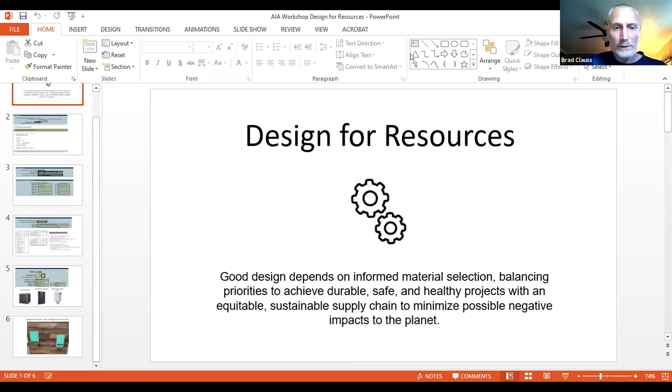So design for resources, with respect to, I know we're sort of running behind on time, I'll try to go through this one pretty quick. The inputs on this section were pretty straightforward. The first one being the embodied energy, or sort of a calculation in the tool of the embodied energy.

Obviously, as Alex referred to before, there's a lot of more complex and involved models for embodied energy. I believe the one we used was from the Rocky Mountain Institute, called Green Footstep. But for the purposes of the tool, and for consistency in comparing projects, everybody would be using this same calculator. My experience with it was very simple, minimal number of inputs, so certainly most projects will have those parameters readily available.

The conclusion of the output was our embodied energy benchmark was actually representing fairly well, which was certainly good news for us to hear. That is, we're at about 42% of what the benchmark would be for embodied energy, based largely on the materials of construction and footprint of the site, as well as some of the usage of the site and the native plantings and how the site was restored.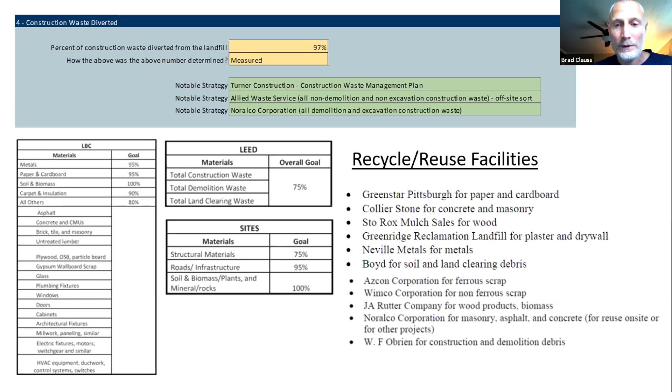Number 5, I believe the last input on the resources section of the COTE super spreadsheet, is the spend evaluation of recycled and regional materials. It asks for total materials cost out of the overall project cost, which self-populates from an earlier field, the total construction cost. This was another thing I was a little concerned about identifying, but fortunately, through the LEED and LBC frameworks, we already had materials tracking sheets broken down by spend, so I was able to pull that information from a summary spreadsheet.

It turned out to be around just under $3 million of total materials cost on the project. Within that, the total cost of recycled materials was roughly 28%. The total cost of regional materials, using the loose definition of sourcing within a certain radius of the site, was rather impressive.

I think that largely speaks to what I mentioned before, that Pittsburgh has a lot of industry associated with construction materials in the region, so we were able to source a lot of the bulk materials locally. That total was around $2.25 million of the overall spend, and percentage-wise, getting close to 80% of it was sourced regionally. There's not an enormous amount of wood incorporated into the project, but all of it was FSC certified and is documented in the material tracking spreadsheets.

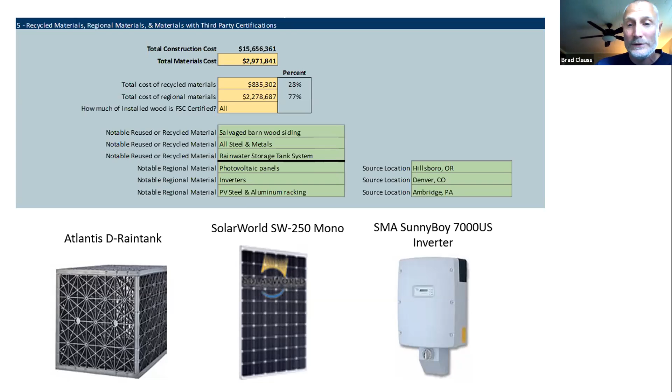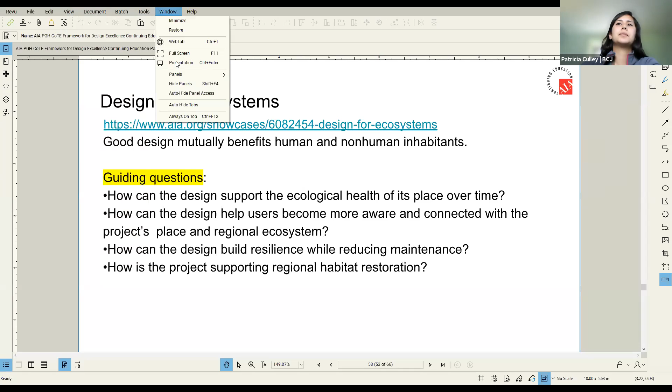So designing for ecosystems, even though this section of the AIA framework is certainly not as intensive and technical as the water, energy, and materials portions, it's still a very important element of the framework. So we'll chat a little bit about what it actually means.

Designing for ecosystems is very much about connecting with the natural world, specifically focusing on each project's local environment and local flora and fauna. When a project's situated in a natural setting, designing for ecosystems still should be a very intentional effort, although that design effort may be more simple to implement.

However, when a project's situated within an urban context, designing for ecosystems can be a little bit more challenging. So we'll talk a little bit about what that looks like.

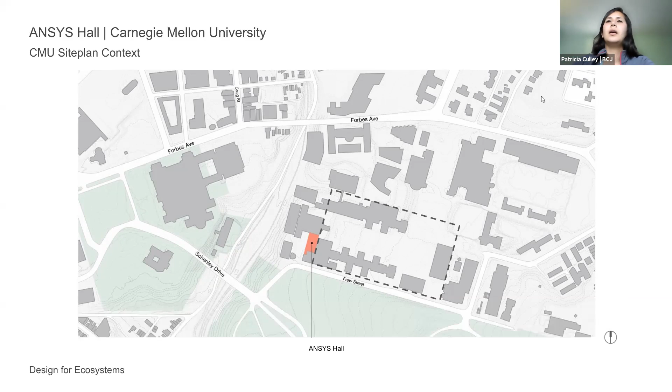Zooming in here now, this is a view of the building site plan. The site was originally a parking lot, honestly just completely hardscape, a mix of asphalt paving and concrete sidewalks, so really no vegetation at all.

The new building was conceived to nestle between all of these existing buildings while maintaining a pedestrian pathway that cut across the site, a public pedestrian pathway. It technically abuts 4 existing buildings at 7 unique levels, just because of the way the existing buildings and their elevations change. So it really is tucked into this corner of campus.

The program requirements for this building were very ambitious, so they pretty much wanted to use as much of the site as possible for the building, and as much of the exterior portion of the site for the programming element—extending outdoor learning was a really important factor. So the ratio of building to site is very high in this particular context, again sharing sort of an urban example.

So how does this building support regional habitat restoration? That's one of the guiding questions we want to talk about.

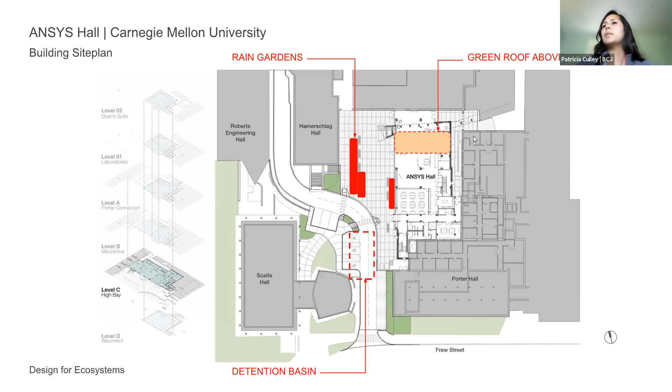Looking back to the site plan, the green roof is located at the upper level above what is the makerspace portion of the program, at the same elevation as the historic mall. We'll take a look at a picture of what that actually does in providing connections to adjacent spaces for this building. The rain gardens are located within the outdoor paved area, which we call the maker court.

Because they're green infrastructure strategies, the stormwater sent within the rain gardens actually has a support system—they overflow into an underground detention basin. That's effectively a capture and slow release system, so that instead of feeding directly into the storm system during a large rain event, it contains the water so that after the event passes, it slowly releases the water that hadn't infiltrated out into the storm system. So this overall system really does help improve the regional ecology of our area.

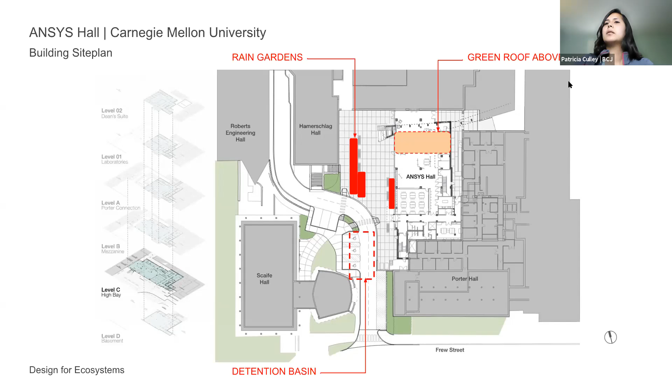So how can the design build resilience while reducing maintenance? By using native vegetation within the rain garden and green roof strategies, the vegetation not only survives, it really thrives without very much effort. Irrigation is not needed at all, and the ongoing maintenance you'd have to deal with in formal landscaping is really not needed within this scenario.

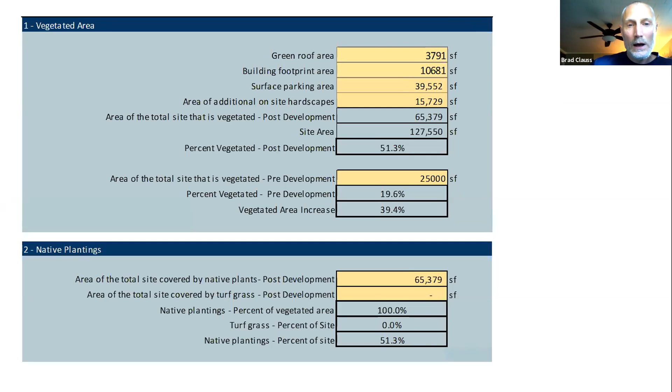For us, there were three or four components we incorporated. First was green roof area on the third floor of the CSL, just under 4,000 square feet. Overall total building footprint area was just under 11,000 square feet. Surface parking area was just under 40,000 square feet for the project site. And then the remaining space, the area of additional on-site hardscapes, various walkways related to the landscaping features themselves, was about 16,000 square feet in total.

It then calculates the area of the total site that is vegetated post-development as it relates to the overall site area, and the percent vegetated post-development. For this particular project, we were just above 50% still vegetated post-development. Then there's the area of the total site vegetated pre-development, and you'll see in upcoming slides the dramatic shift from pre-development to post-development, not only in the quality of the site's ecology but the sheer extent of it. It's pretty dramatic. The pre-development estimate of vegetation on the site was roughly 25,000 square feet. So the calculated metric for vegetated area increase, reflecting what was done to promote that increase, was roughly 40% for the CSL's project.

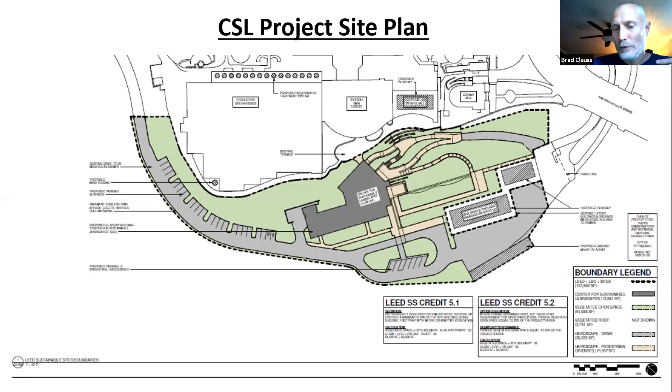This is extracted from one of the LEED submissions, an overall site plan for the project boundaries. You see the perimeter of the site evaluated under the LEED certification process, as well as the same footprint for LBC. It depicts the building footprint, the hardscapes—both the paved parking areas and the hardscapes for landscaping, mostly access pathways to and from the CSL and adjacent buildings in the upper campus—and the lagoon footprint, which is water surface incorporated ultimately into what they'll qualify as the vegetated site. You'll see in the upcoming slide how that's characterized in terms of the overall ecoregion strategy in the planting plan.

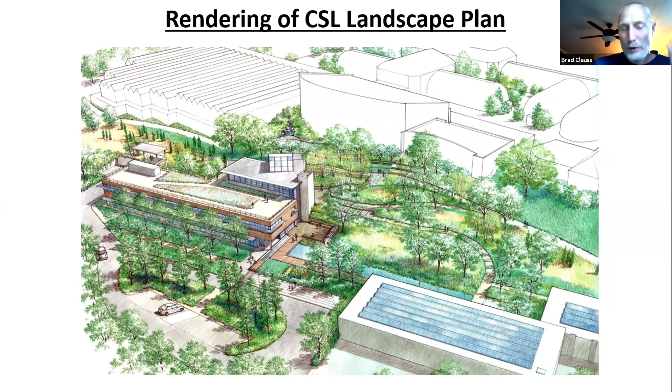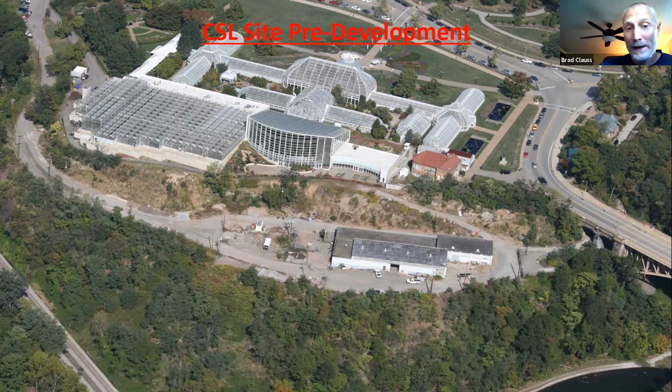Certainly a dramatic shift, and I think nothing speaks more to what we were trying to accomplish with this component of the project—restoring the ecosystem of what was essentially a barren portion on the fringe of Schenley Park. Even as Patty referenced before, the fact that we're in what would traditionally be thought of as a natural setting, being on the edge of Schenley Park, that portion of our site was literally providing zero ecological value at the time of the pre-development stage.

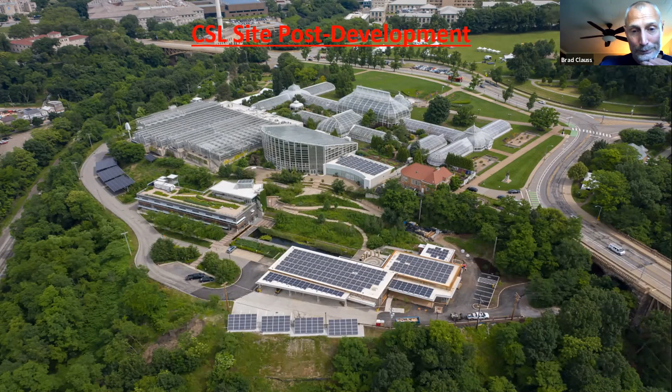And that wraps it up for everything I had on ecosystems. Thanks, Brad.